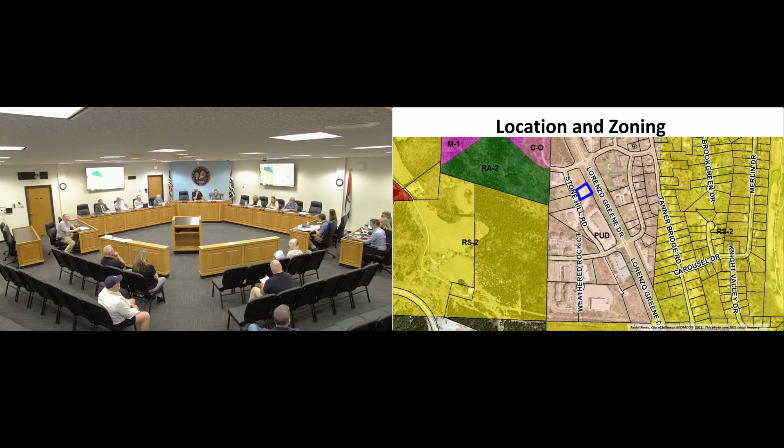Okay, Courtney, please present the case. So the subject property is the property highlighted in blue on the screen. It is zoned PUD, planned unit development. The surrounding properties directly adjacent to it on all sides is also PUD, but extending outward there's a bit of single family or low residential, a little bit of multi-family residential to the northwest, and also CO office commercial located towards the northwest, away from that property as well.

This is the site aerial. The subject property of this request is highlighted in blue on the screen, and it consists of 0.57 acres, for a new clinic building that would be 7,540 square feet. A little bit of history on this site: in 2007 a PD plan was approved for a 6,120 square foot building to the south, that office building, and the subject property itself was also approved for a 56 spot parking lot.

What they're wanting to do today is amend that final PD plan to allow for that clinic building to be placed there instead. This clinic building is for a special learning center, which is using both the property highlighted in blue and the one directly south, the 905 Weathered Rock Road property. Both are highlighted in blue for their purposes, but the PD plan amendment applies to the one highlighted in blue.

The building to the south will be modified, but that would be administratively approved. What you all are reviewing is just the PD plan to place the new clinic building on the property highlighted in blue. So how this works with the commission is that you review that amendment, and then it goes on to the city council for a final decision.

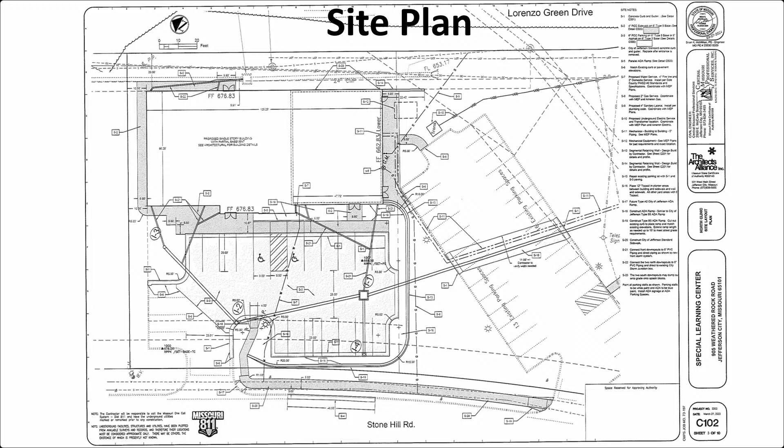As far as the building design goes, first the allowed uses: they are proposing for this particular PD plan to be for that clinic building, and the underlying zoning district of CO office commercial would be applied for determination of future permitted uses, as well as for standards such as signage and lighting.

As far as the building itself goes, it will consist of masonry veneer. The remainder of that exterior will be comprised of pre-finished metal wall panels, and the roof will also be metal. That is some initial details.

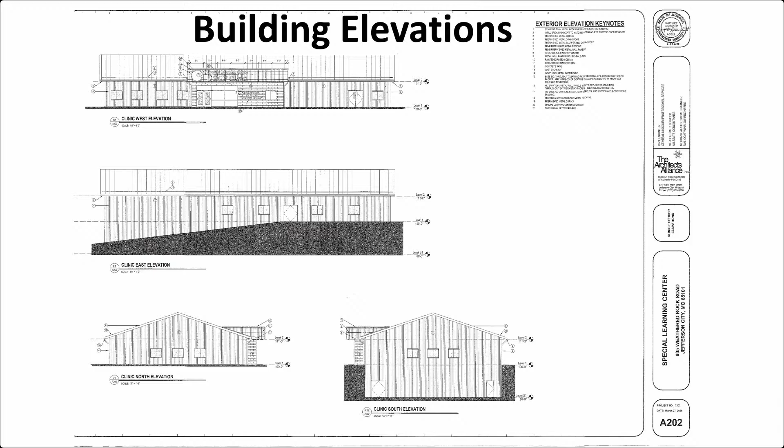Good evening. I'm not sure I have a microphone, do I? You do. Oh, is it that little thing? Yeah. Hello, I'm Stephanie Johnson.

My address is 117 Kingsbury Court, Jefferson City, Missouri, 65109, and I am the Executive Director of the Special Learning Center. Thank you so much for letting us appear before you today.

We are very excited at the Special Learning Center as we are wrapping up a $13.5 million capital campaign to bring the Special Learning Center to Weathered Rock Road.

Our organization is a long-standing nonprofit in our community that was established in the mid-'80s. In 1991, we constructed a facility now located between Thomas Jefferson Middle School and Lawson Elementary School. After two expansions of that building, we are landlocked and at maximum capacity. We definitely need additional space.

Our current facility is about 15,000 square feet. We were very fortunate to find this location at 905 Weathered Rock Road, an existing 31,000 square foot facility, but though it meets the current needs of Special Learning Center, it does not meet future growth needs of our organization.

We purchased that property from Dick Otke and his family, and it came with two parking lots. Working with Architects Alliance and CMPS, we've identified a need to add an annex building onto that property, which is what we're proposing today. It will house the occupational, speech, and physical therapy clinic of the Special Learning Center, as well as a small gymnasium and a basement for storage and storm shelter as well.

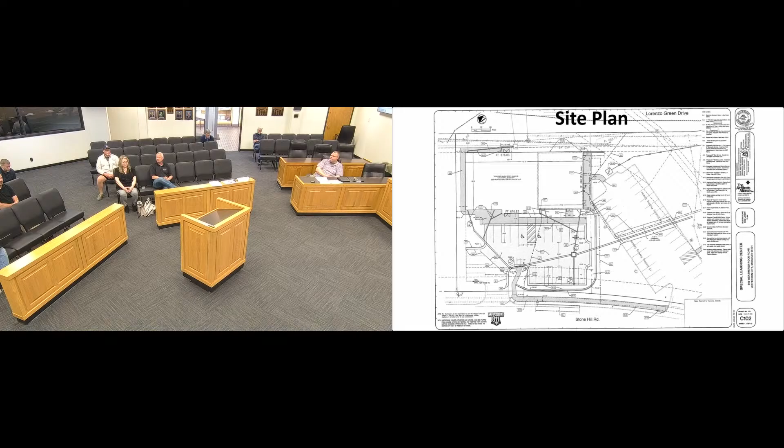Is there anyone present who would like to speak in favor of this request? Is there anyone present who would like to speak in opposition of this request? Is there anyone else who would like to speak on this request? Okay, seeing none, we will now close testimony.

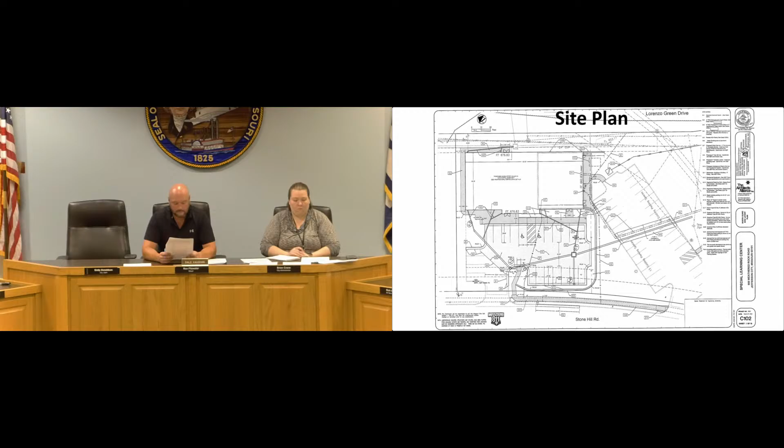Courtney: The staff has reviewed the final PUD plan amendment and has found that the use should be compatible with the surrounding property and existing land uses. Staff recommends approval of the final PUD plan amendment and the establishment of the CO, office commercial zoning district, for the purposes of determining future land uses and for site elements such as signage and lighting.

There's a form of motion up there which would recommend approval of that final PUD plan, establishing the underlying zoning district of CO as one condition, and the second condition is to address any technical comments and corrections of staff.

This proposal will go on to City Council for readings on June 3rd and June 17th. Both of those meetings will be held here at City Council chambers at 6 p.m. Then the engineering staff report will follow. Thank you, Courtney. Go ahead, Chance.

Chairman, as far as the Public Works Engineering review, a new driveway has been proposed to the main facility off of Weathered Rock Road. There is another driveway where the parking lot facility is proposed to be built. Stormwater will be directed to the creek area. No additional impervious areas are being created for the new building and new parking where the old parking lot is, so no additional treatment would be necessary. The proposed building is served by an existing sewer main on the property.

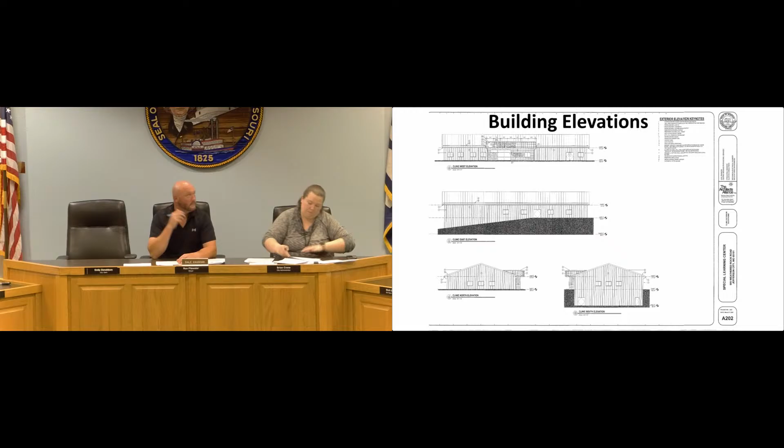Move to recommend approval of the final PUD amendment with the following conditions: to establish an underlying zoning district of CO office commercial for the purposes of determining permitted uses and standards for site elements such as signage and lighting, and to address technical corrections and comments of staff.

Is there any discussion? Is there a second? Second. Is there any discussion? All in favor say aye. Aye. All opposed, nay. Motion carries.

Okay, we'll move on to the next case. 3450 West Edgewood Drive. Courtney, would you please present this?

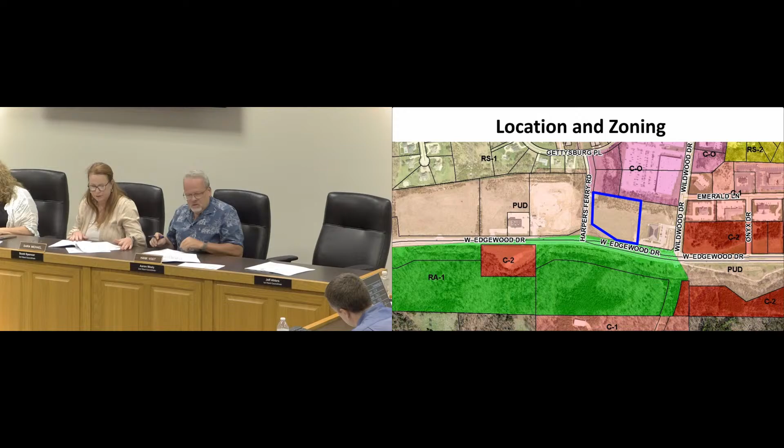The subject property is highlighted in blue on the screen, and it is currently zoned for planned unit development. The current lot is vacant. Adjacent zoning to the north is CO office commercial with office use. To the east is PUD planned unit development with medical type uses. To the south is RA1 high density residential with agricultural use currently there. To the west is also PUD planned unit development with medical uses as well.

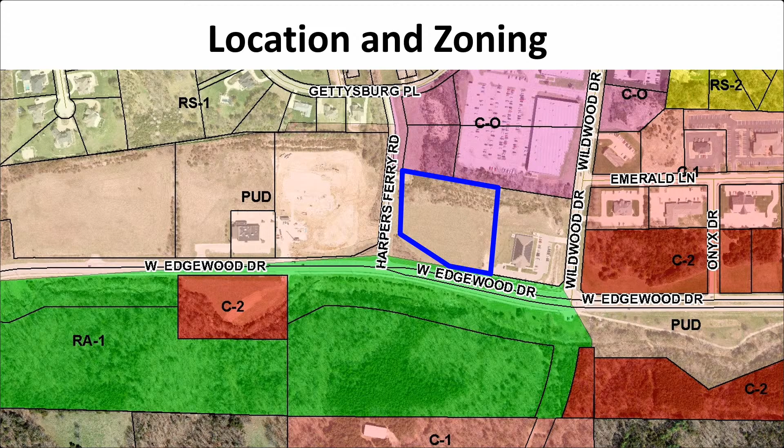This is a site aerial of the subject property, again highlighted in blue, consisting of approximately 4.5 acres. Looking at the zoning history, the property was rezoned from RA1 to C4, which is now PUD—basically a commercial-oriented PUD district—and this was done in April of 1994.

The final subdivision plat of the CC West Subdivision, Section 2, was approved in 2005. Moving forward, a preliminary PUD plan for Lot Number 2 and the preliminary PUD plan for Lot Number 3 was approved in 2005, but the development never occurred. This was for retail-oriented use, but again, the development never occurred there.

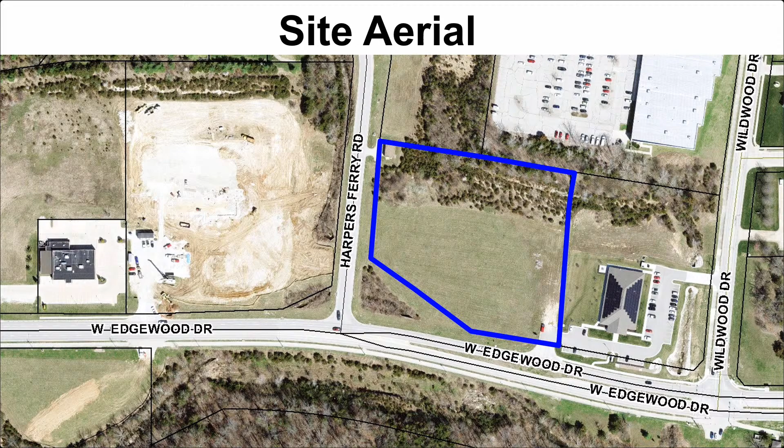So what they're requesting today is a preliminary PUD plan for a 52,868 square foot building—a 3-story building for the Missouri Primary Care Association, consisting of lobby space, office space, and an auditorium.

Going into a few of the details on that site plan: a buffer yard is not required. As far as landscaping goes, there are 27 trees with additional planting proposed at the site. For lighting, pole-mounted lighting is proposed, along with existing street lighting along West Edgewood Drive.

For parking, the amount of spaces needed is reflected by the standards of the zoning code, which reads as 1 space per every 300 square feet of gross floor area for offices generally. Since this is multi-use with an auditorium and an office, that's how the office affects the parking calculation, plus 1 space per every 4 persons based off the maximum capacity reflected in the auditorium use. So they're proposing 186 parking spaces.

Sidewalk placement is noted on the PUD plan to occur along both West Edgewood Drive and Harper's Ferry Road. For signage, there's a 4-foot monument sign proposed along West Edgewood Drive, and a 2-foot monument sign proposed near the building's entrance.

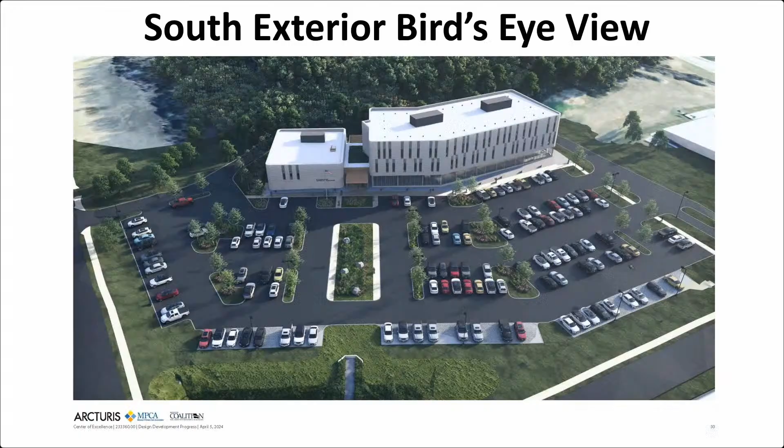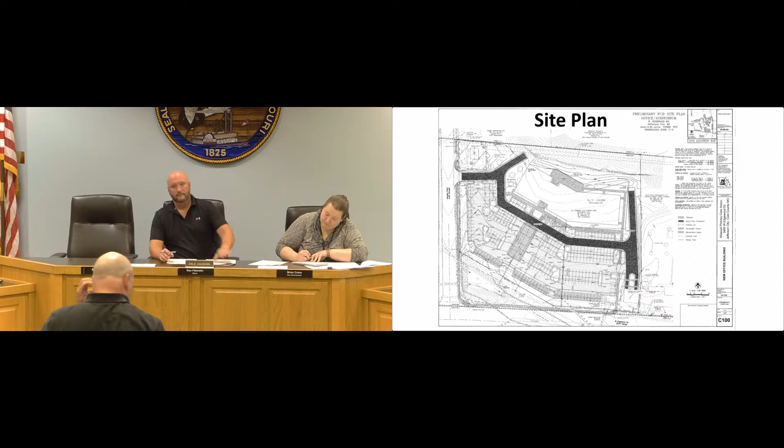Please come forward to the microphone and give your name and address for the record. Good evening, my name is Glenn Strump. I'm an engineer at Central Missouri Professional Services at 2500 East McCarty Street.

We are requesting approval of the preliminary PUD of a proposed office auditorium for MPCA, labeled as the Center of Excellence. The Center of Excellence would be a 3-story, 50,000 square foot office, training, and conference facility. The facility will house the shared offices of the Missouri Primary Care Association, known as MPCA, on the 3rd floor, and the Missouri Coalition for Community Behavioral Healthcare on the 2nd floor.

Each office suite includes a reception area, private and open office space, a collective kitchen area, and storage. The facility's 1st floor is dedicated to supporting the training missions of each organization. Flexible multi-purpose conference and training rooms flank a 150-seat tiered auditorium. A public reception area and additional small lounges provide pre-function and breakout areas for the conference and meeting rooms. Food service, hospitality, and storage facilities are provided to support all meeting functions.

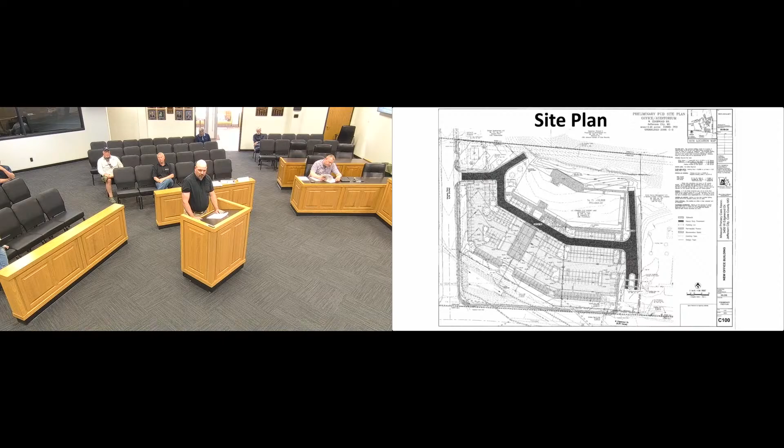Sustainability measures are being incorporated into the design, as they are important considering the mission of the two organizations for physical and mental health. Sustainable design elements include landscaping with native planting, using pervious pavement in select areas to aid in stormwater management, and solar panels being considered on the building and possibly in the parking lot. In addition, the Chamber of Commerce has given their full support of the project.

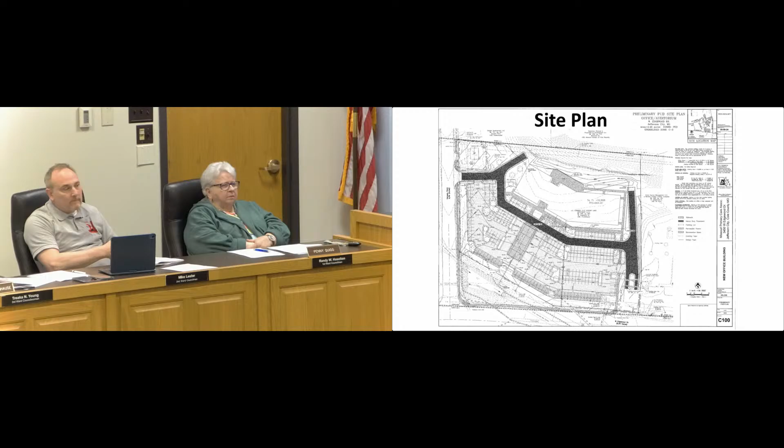Mr. Chairman, I noticed on the parcel here there is a telecommunications hut. Has engineering or anybody reached out to, I'm assuming, Brightspeed's property at this time? I believe so -- I don't know if that has occurred yet, but I know that would be important as far as our utility review goes.

For the final plan, that would certainly be something to make sure they've got a separate driveway. I find it unusual that this is not on a separate parcel. Generally speaking, all plant and centrally assessed property such as that should be on a separate parcel by the assessor. So if you look at an Ameren substation, it's going to be on a separate parcel or state assessed.

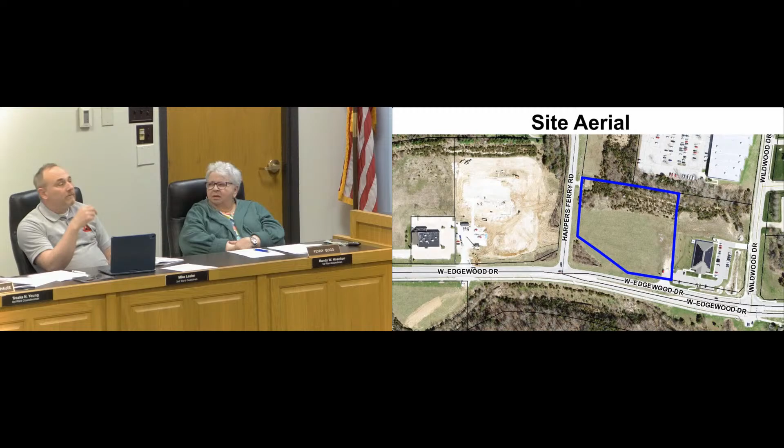We want to make sure that there's either adequate easement in place or adequate use for the property. I'd have to defer to the consultant regarding specific discussions with Brightspeed at this point. There hasn't been, but there is an easement already on it that was established way back when they developed Edgewood. There's an easement already established there, and it is the property of the chamber at this point, established about 20 years ago, last I remember, but we haven't reached out to them yet since it doesn't seem critical as long as we don't infringe on their easement. It's just the parcel -- like I said, it's not very common. Normally it's a separate parcel, they own the property typically.

The only question I have too is the pervious pavers -- that's for water retention, instead of having a holding pond? Well, we're doing both. There's a detention basin there in the middle, and then the pervious pavers -- it's kind of a water quality measure too. So it contains both, and like I said, they're very self-conscious about the environment and stuff, so that's why they're leaning that way.

Does that reduce the size of the holding? Because I know sometimes that can limit the property. Yeah, it would definitely help the detention basin, because the detention basin basically slows down the water, and it's got relief for huge floods. But since we do have the existing storm basin on the south side there, it's pretty nice -- any overflow goes right to it.

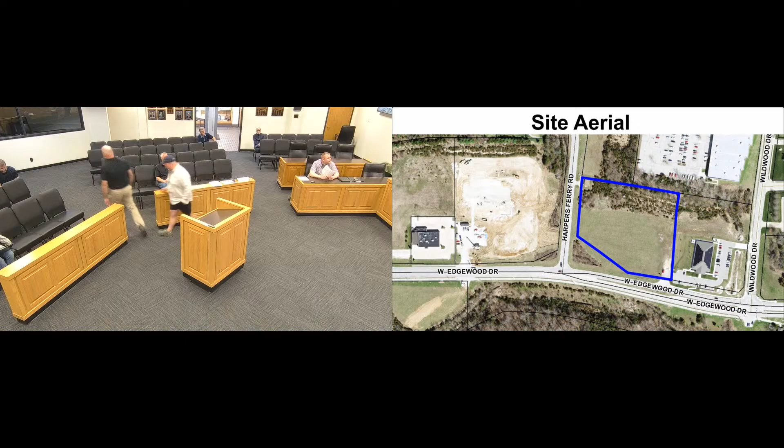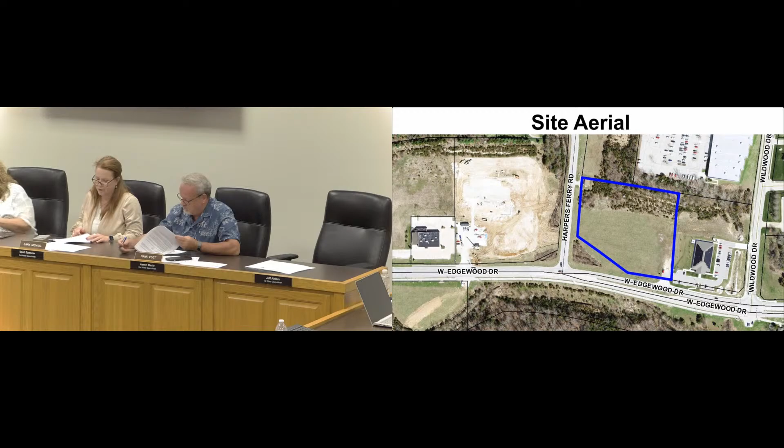Do any commissioners have any questions for the staff? Seeing none, would someone like to make a motion? I'd like a motion to recommend approval for the preliminary PUD plan, following condition: establish an underlying zoning district of C2, general commercial, for purposes such as determination of future permitted uses, and standards for signage and lighting. Second. Is there any discussion? All in favor say aye. Aye. All opposed, nay. Motion carries.

Courtney, sorry, I guess we'll be turning it over to Eric for new business.

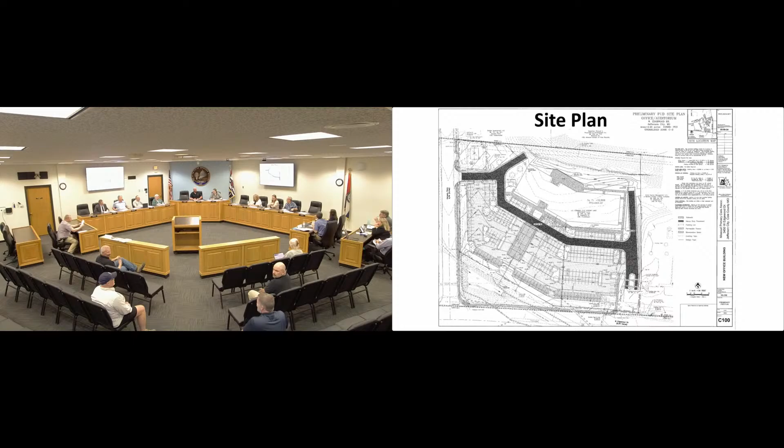Yeah, this will proceed to City Council, shown on the screen, with a public hearing on June 17th, 6 p.m. in this room.

The Stronghold Landing PUD plan was scheduled for a public hearing at the City Council's next meeting. And then the rodeo use on Boonville Road, again scheduled for the next meeting, and the subdivision plat, the Ridgecrest subdivision section 5, again scheduled up for the next meeting. So all that would take place on May 20th, 6 p.m. in this room. So waiting for those to be acted on by the city council.

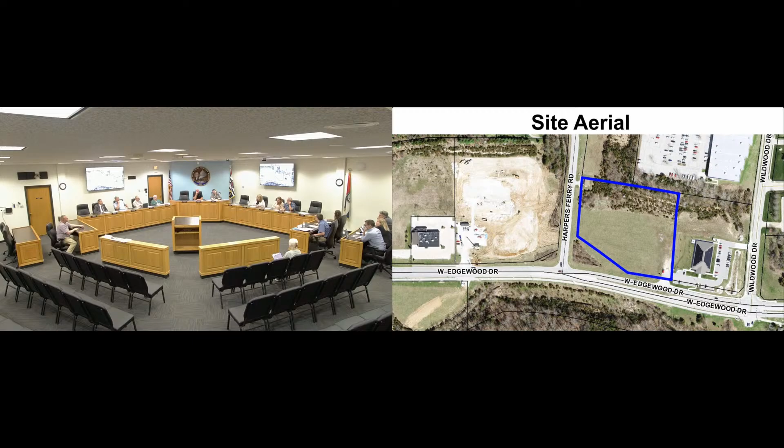Still in process. So, is that the old Kohl's site? Is that where Kohl's was going to go? Or was that further?

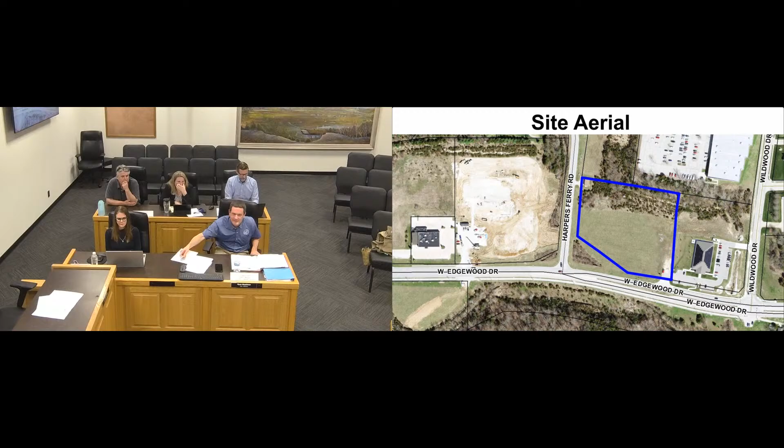Courtney touched on that during her presentation. In case you weren't aware, Kohl's was originally proposed for that property on West Edgewood, and then just across the street, and so that's where the construction site is shown on that air photo. But on the property for this other case was a grocery store. That's some of the history that Courtney included in the staff stuff, and that was 20 years ago or so—a fair amount happening there. Just figured I'd give some commentary on that.

Zoning code amendments—especially for new members, I'll touch on this a little bit. At the last meeting, I had given an overview of a couple different planning documents that were recommending—not necessarily recommending zoning changes, but at least to look at them and give them a review—especially in respect to things dealing with housing. Some of those can be things such as density allowances within the residential districts, but also some higher level stuff.

I'd given an overview of what the two major planning documents touch on. One of those documents is a housing study, available on the departmental website that I showed you in the orientation. The comprehensive plan also has some recommendations on housing. At the last meeting I'd referenced that it's our intent to continue talking about this in order to put together, perhaps, a package—or however the commission feels appropriate—to move forward on zoning code amendments dealing with that subject and looking at these recommendations.